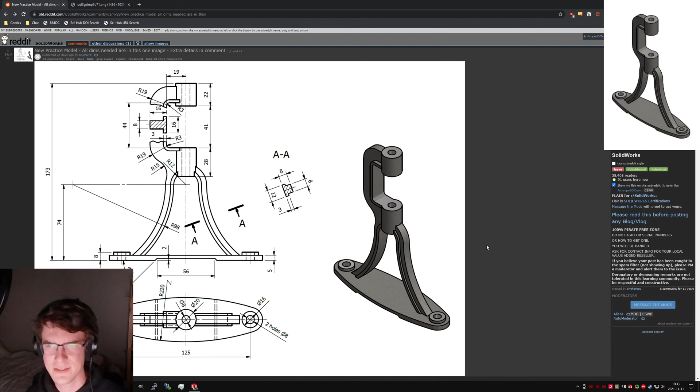Yeah, this is good, okay. It's weird, it's got lots of sort of swoopy sections. It'll be difficult to do feature golf on, I think, just because you have lots of things that'll be interfering with the center hole. So somewhere where you might try to do lots of cut-throughs all at once won't really work.

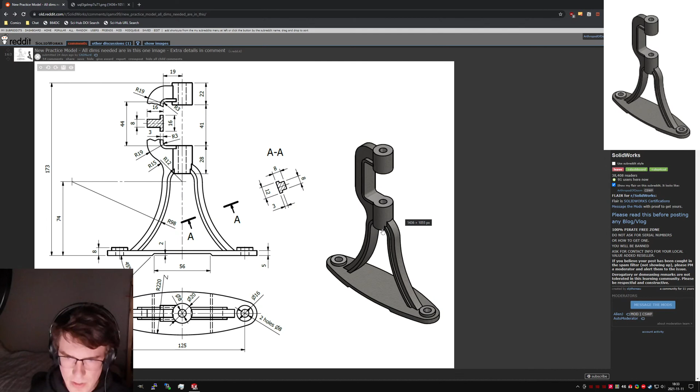Yeah, it should be interesting. So I'm going to chuck this up on my other monitor, assuming I remember how to do that, and I've got a reference up there. And I'm probably going to get some dimensions wrong.

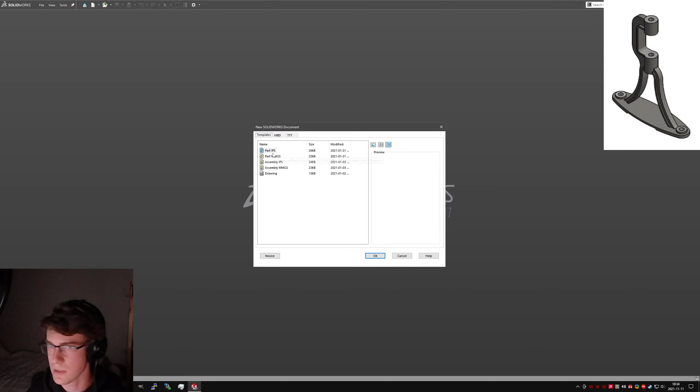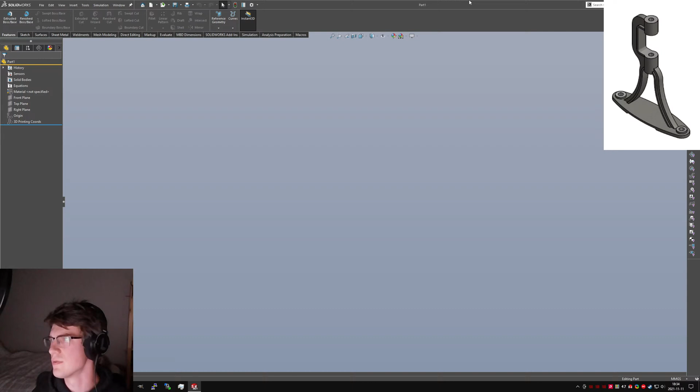And I think I'm not going to do feature golf first, because that's going to be a pain. Yeah, let's not do feature golf first. So I think what I want to do is have... man, it's just complicated as all get out.

We'll start with like the floor, because that's an ellipse and it's easy. Once I remember where ellipses are. Oh, they're not ellipses, it's radii. Oh, gross, okay, well in that case we'll do it...

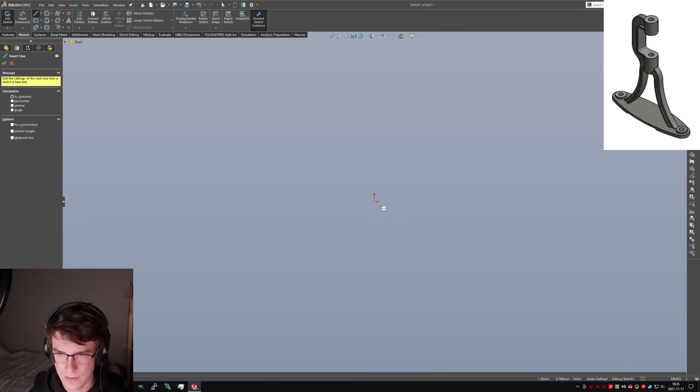Let's come up here and out, and then use this guy. Oops, come on, give me the arc I'm asking for, thank you. Okay, that seems okay, we'll extend this guy. Definitely not going for world records here. Whoops, I made that really close to the middle, didn't I?

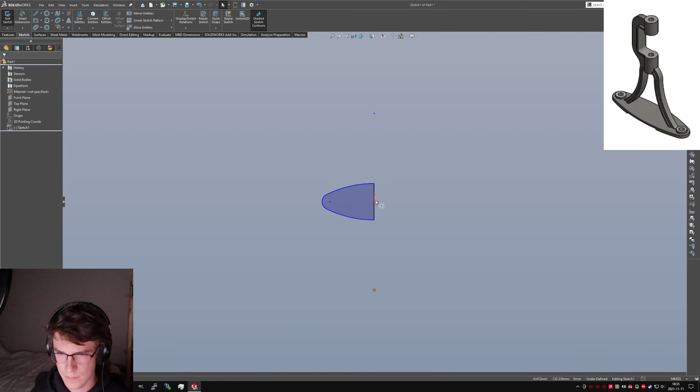Gotta make those on that point so that it's continuous. And we are 220 millimeters. This is 12 millimeters, and these are 125 apart.

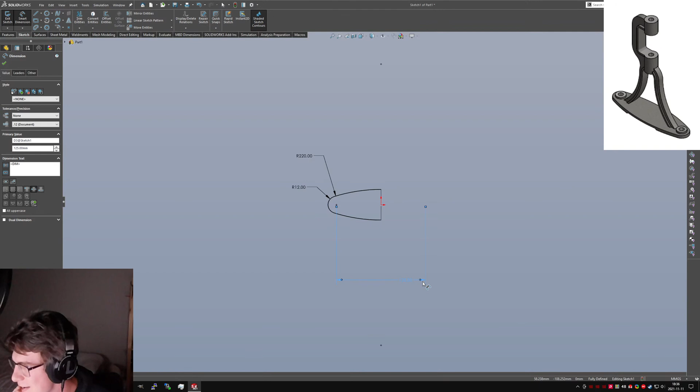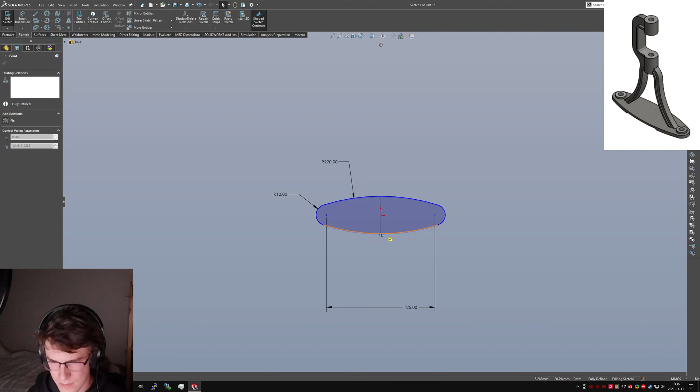Do we have a dimension for the width of this thing? Because it kind of looks like we don't. Yeah, he definitely said all dimensions included, but... hang on, how does that become defined that way? Okay, I guess that becomes defined that way. Oh, hang on, no, I guess that is enough. I think that's enough to constrain all the degrees of freedom.

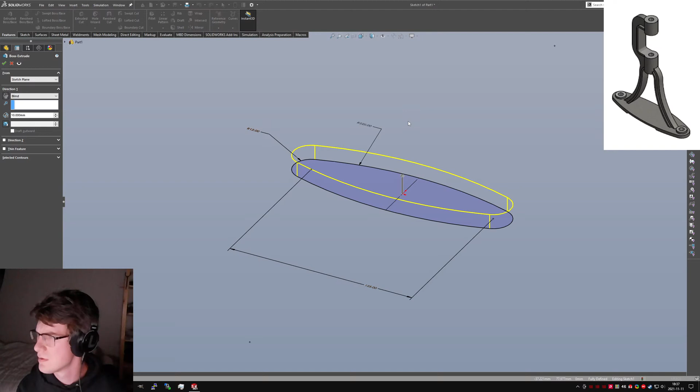Aimed wrong, aimed a little bit funky, maybe I'm just sitting lower. Okay, hang on, where did my reference go? Reference, we're only 5 millimeters tall up here? 5 millimeters tall, there's 2 extruded bosses up here.

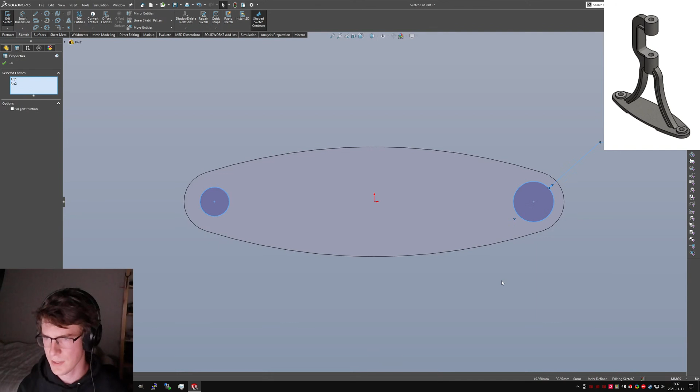Oops, man, something is just laggy today on my machine, do not know what it is. Control A, Alt Q, nope, it selected the dimension too. Let me do it, okay, well that's good anyway. Features, extruded, and because it's dimensioned as being 8 millimeters off the floor, I'm going to do it that way.

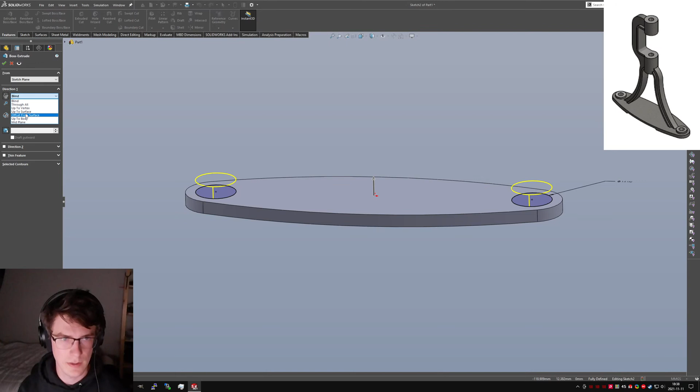So we'll do offset from surface, and from the floor here, let's say 8 millimeters, other direction. Yeah, cool, so now we have this kind of funky clamp shape, which is just bizarre.

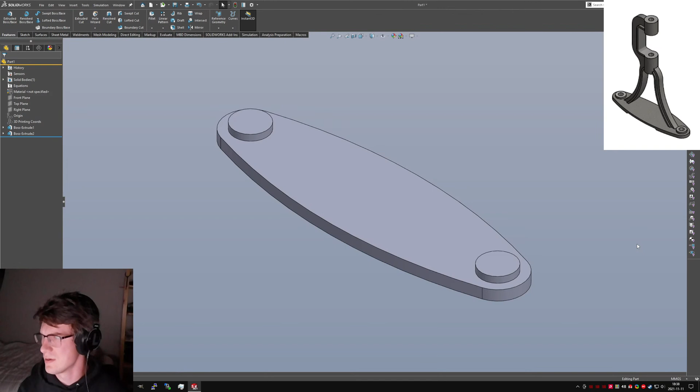I think I pretty much just have to wing this one. Like there's no way around except through. But there's some symmetry, so that's, you know, small victories.

Oh, and there's some crime happening outside.

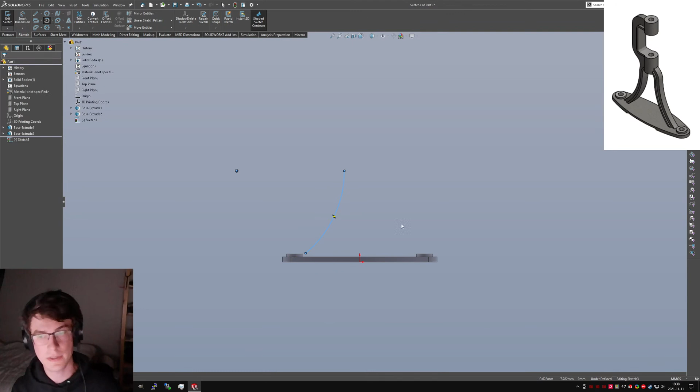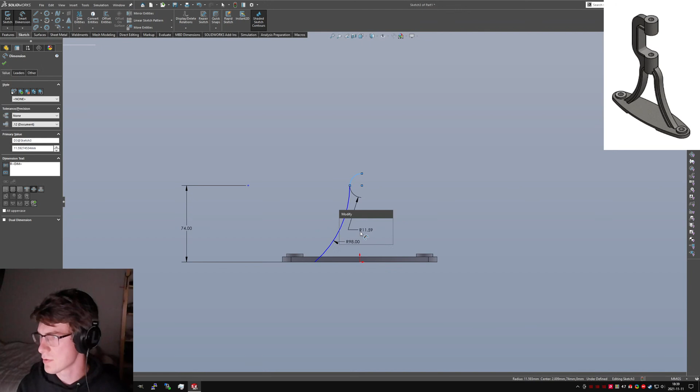Let's do... we only dimension the outside of this one, so we can say that's 98. And say that's 74 off the top. We'll cut that guy there and make this one all do all the things and stuff. That 12. Vertical.

Quickly symmetrize that, see what it doesn't like. Okay. This is a horizontal transition point, so that does need to be horizontal, and then it squares away. Okay.

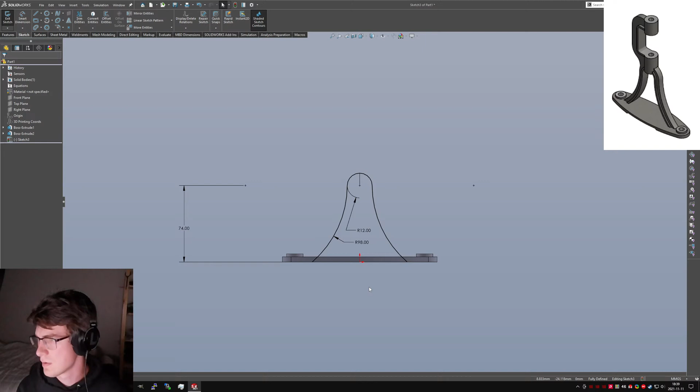And then we do, let's offset this one. We know from this perspective that it's 8 millimeters thick.

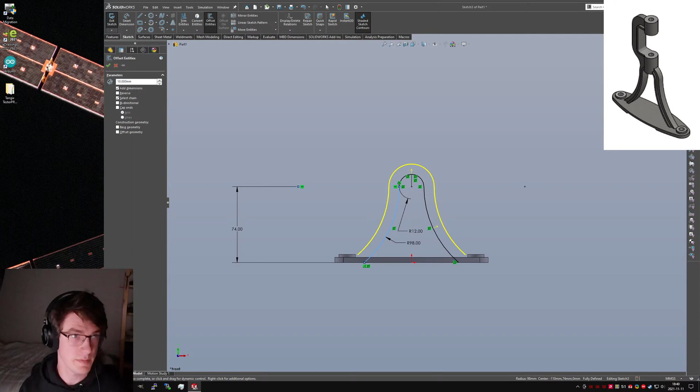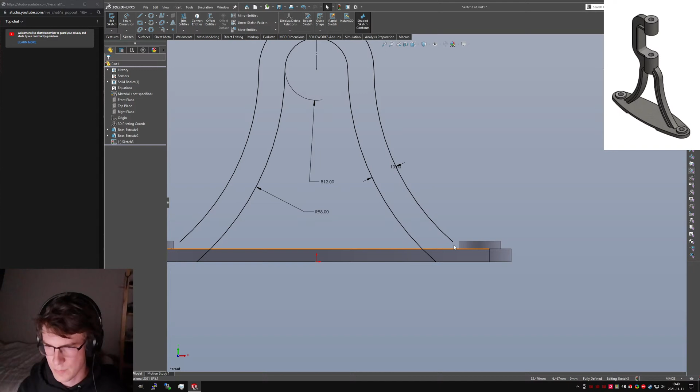I'm good at what I'm doing. Let's offset all of this. And we'll just continue this sort of down here.

Looks right. Now we have to do some more chopping up. Since now we're doing kind of weird... I don't even know what this is. This is getting weird. The shape gets really weird here, and there's lots of sequential arcs traced in funny locations.

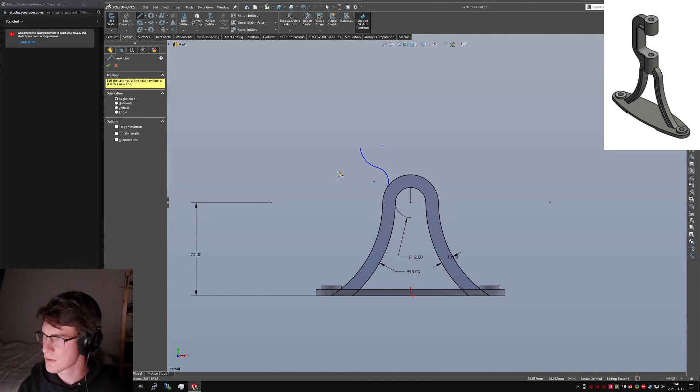Oh, and on top of that, it's not really well defined. But I do know how thick it is, which will help me a little bit, I think.

And I have IDs, as well as ODs for these. 19. These two are equal. Make this one 15, I think, the ID. Yup.

We'll use this reference construction line down here. And offset. Not convert. Whoops. Of course, I'm going to lose my selection now. 16. This is really good.

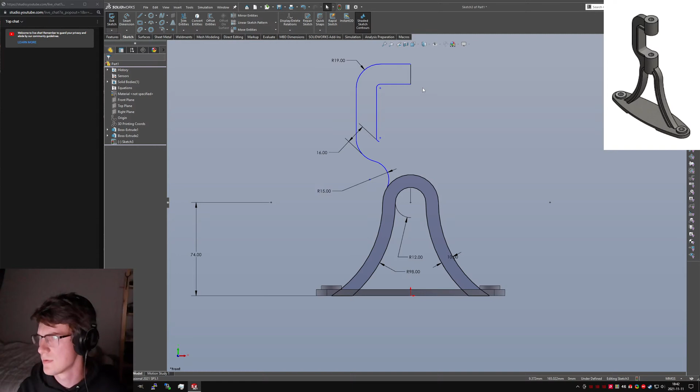We'll just come out to the midpoint here, come down. And then trim, and place with construction. Doink.

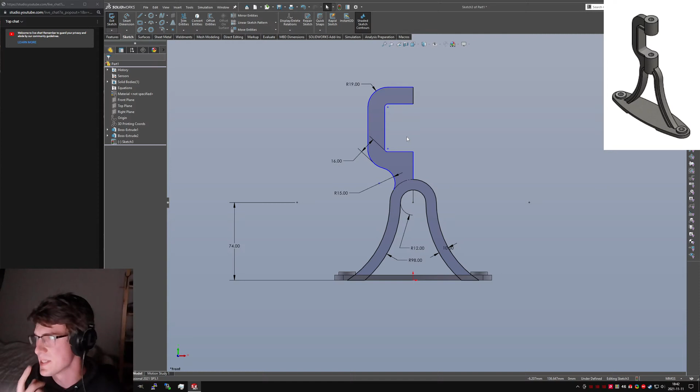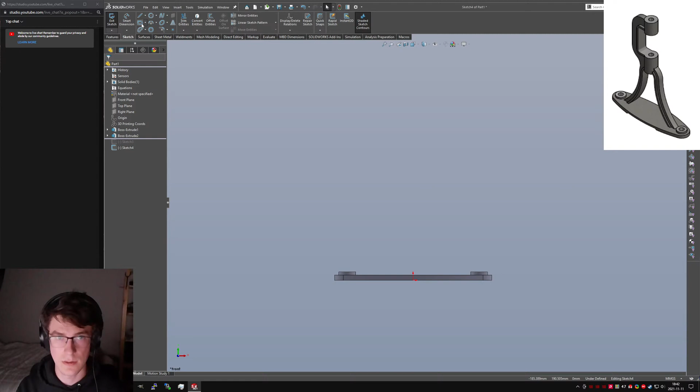Okay, now I think the problem is that we don't have any well-defined heights for the bases and locations of all these things. So I'm going to exit the sketch briefly, and go before this and make a sketch of 2 rectangles. We can use these from the other dimensions. Like, we know the height of this rectangle, the spacing, and the height of that rectangle, and we know the height overall. We can use those to do everything else.

So, I mean, it's a weird way to dimension it, but I don't know. I'm not the one making the casting.

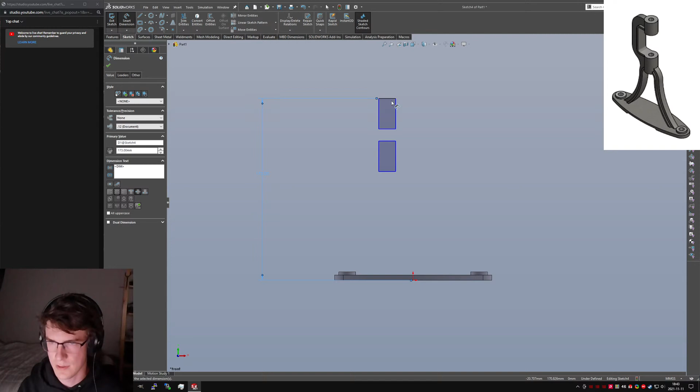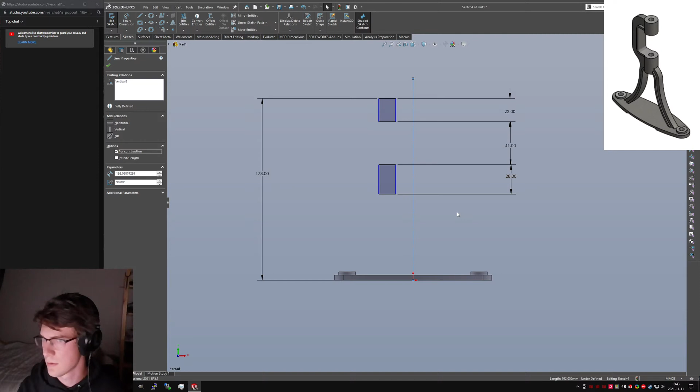41 and 28. Just draw a big line up here. I think I can probably just make that collinear because I want to. They basically want to be solid, so.

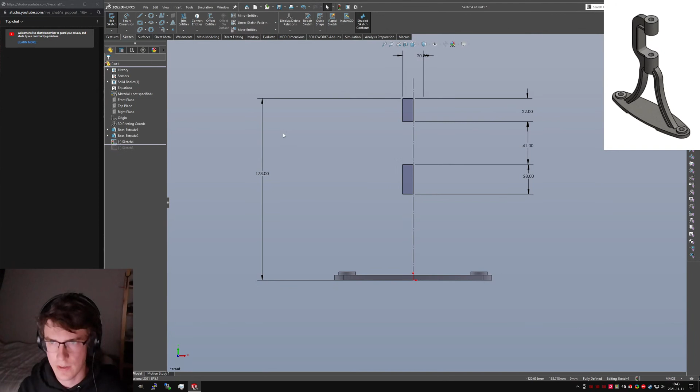But the OD wants to be 20. Collinear there. Features, revolved boss. Should produce 2 things out in space. Great. Okay, now we can use that sketch to control where everything else is.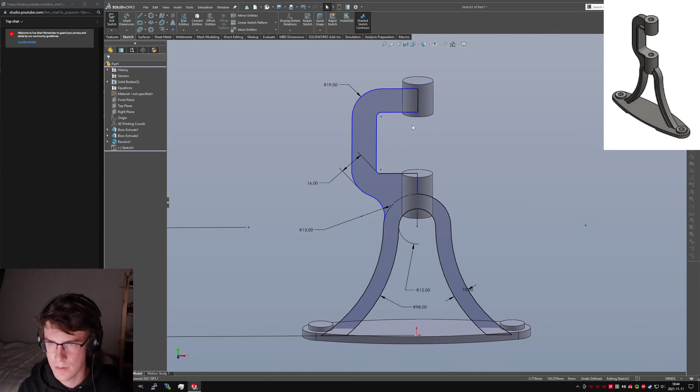Oop, none of that. It doesn't show an offset, does it? Ah, 44 inside in here. I could have figured that out, but I didn't, so.

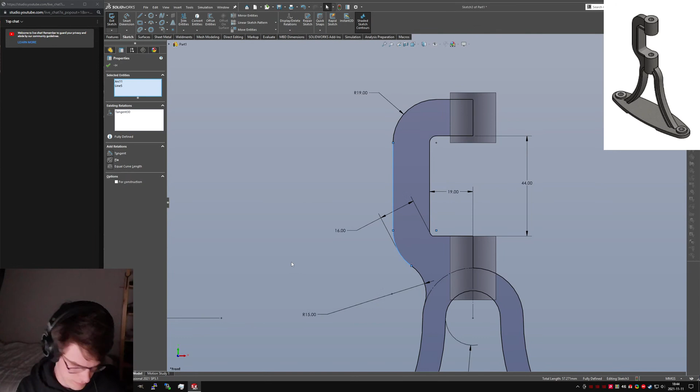Make those collinear. And then 19 off center line. Oop, that's all jacked up now. Oops. Good messages. Sad messages, mostly. Anyway, that's all of that, I think.

And we know it's 8mm thick in all places, so we can just quickly do 8mm, not blind, but mid-plane.

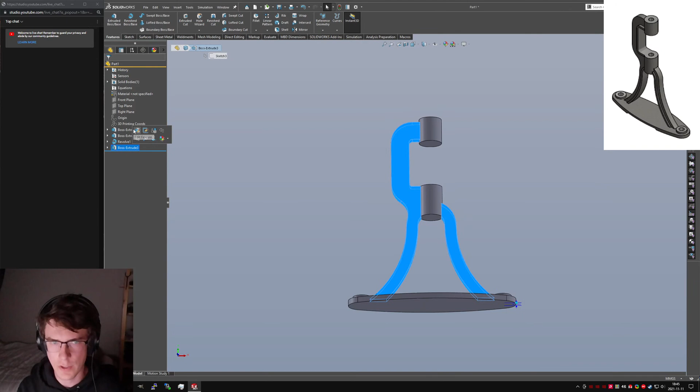Sweet. Ooh, you know what? I can't just assume that is... I can't just merge that, because I need these curves. I need those curves. Maybe I don't. Well, actually, I kind of do.

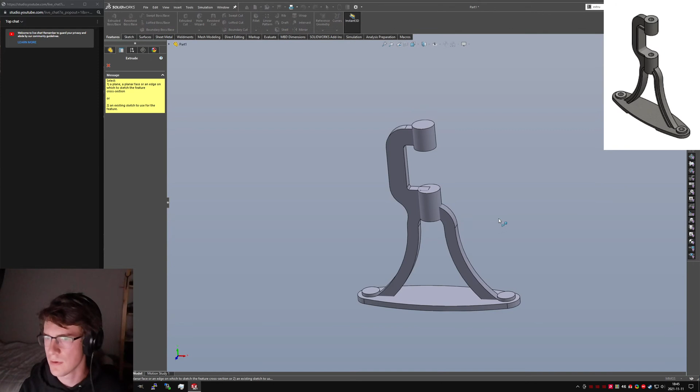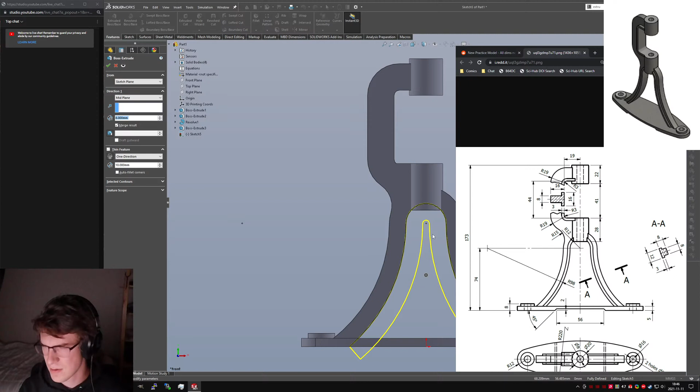So what I'll do is I'll go to the front plane. I'll say these curves, convert, features, extruded boss, mid-plane, and we can use this -- well, I'll have to finish drawing it up first -- but we've got a 3mm thick sort of web. Well, it's not a web, it's more of a foot flange, I guess. It's 12mm thick, so we'll say mid-plane, 12, 3, not mid-plane -- actually wait, yes, mid-plane on the direction. There, it's one direction on the thin feature that I want.

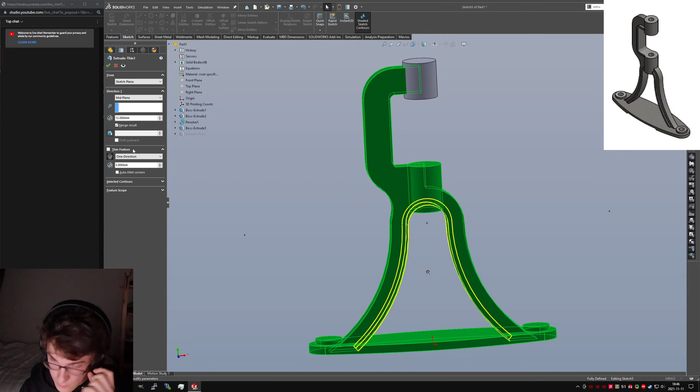There we go. Nice, it merged right in. Let's not merge yet, though. Or if we do merge, I'm going to merge with just this guy. And then I'm going to do the same thing with this one, except it's a 16 web.

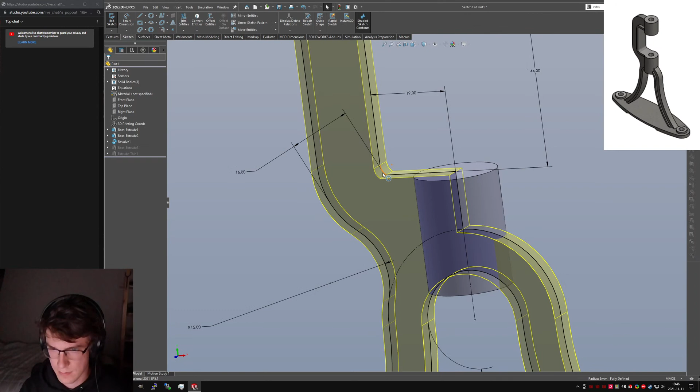And that doesn't look right. Hang on. That should definitely be tangent, right? I'm not hallucinating. We're just going to delete that offset there and not think about it too hard.

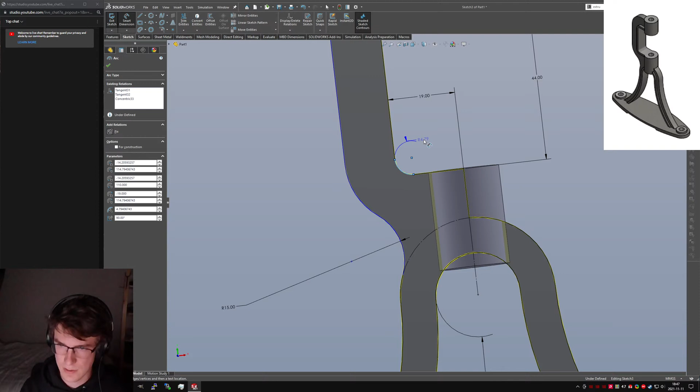Is this tangent everywhere that it should be? Okay, these should be concentric, I think. Why are you suddenly... Oh, because this no longer has a defined depth, and this no longer says 3 on the inside. Yeah, come to think of it, I think the original drawing is actually...

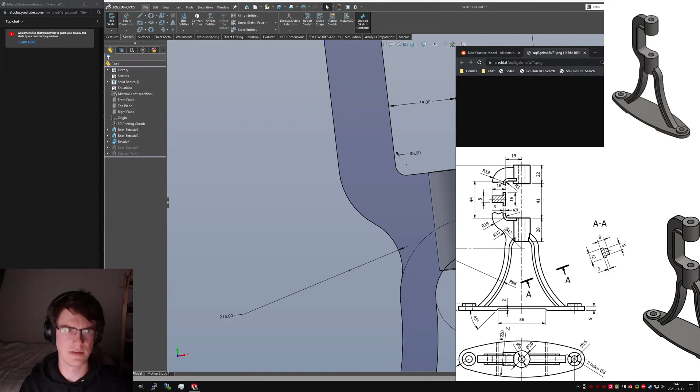Some of those should definitely be construction. Like, yeah, some of these should definitely be construction. That can't say 16, and also R3 and 19, and R3 and 19. Like, some of these should be construction dimensions, which is a little sus, but I don't know. It's a competitive drawing, just to see if you can get it accurate. And also a little bit cockeyed.

These need to be concentric. Some things aren't tangent. There we go. All tangent, all squared away.

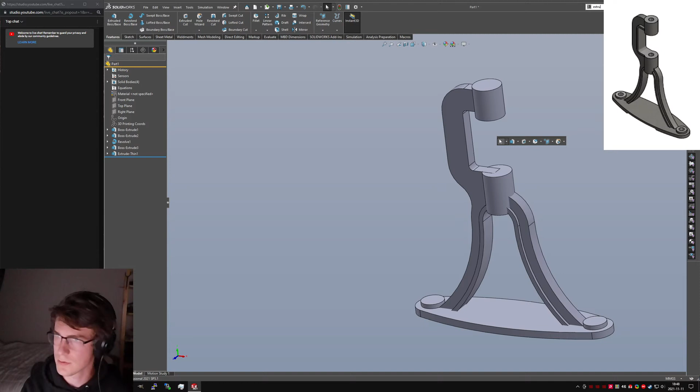Same deal. Front plane. Grab a couple of edges. 16 and 3 thick, so we'll do an extruded boss, front plane. Whoops, wrong plane. Extruded boss, front plane. Thank you.

Convert. Really easy to make webs this way.

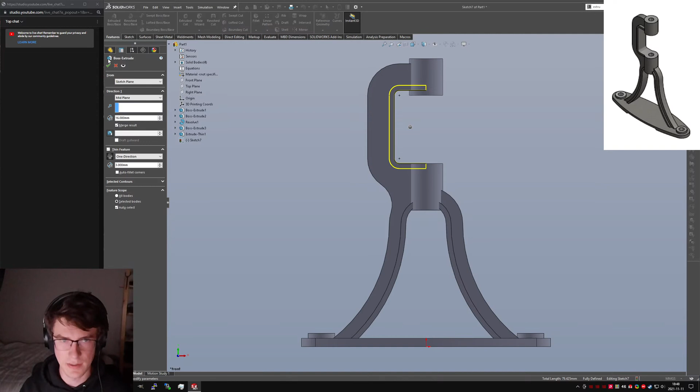And then if we say merge all, it should bring everything together. Correction: merge everything, all bodies, please. Thank you. Although it was clever enough to only merge with this one, which was a little bit neat.

Now I think it's just hole wizards. So, hole wizard. Oh, it's 8 millimeters in every location.

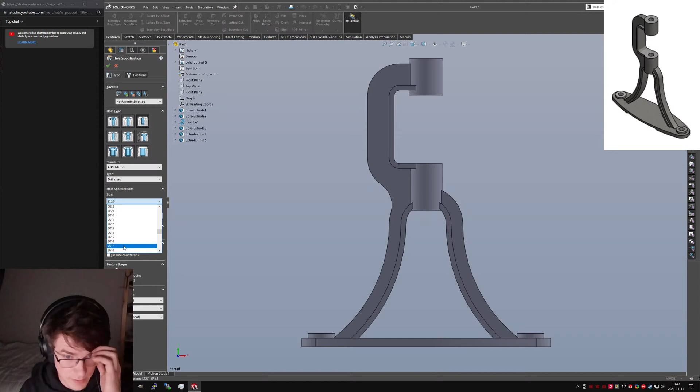So we'll just do... Oh, can't just type the number and have it pop up. That's annoying. So you could do this in 2 different features: one through the top, and then 2 separate ones down here. But I'm not a huge fan of that.

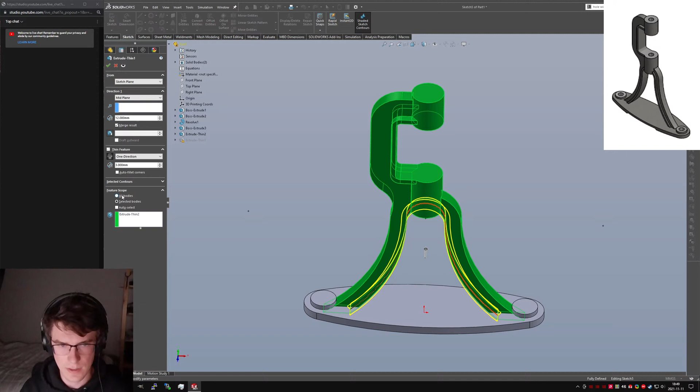I think it's better... Oh, hey, that merge didn't do that. Hang on. If I do the extrudes in a different order, and for this one say combine only with these, then with this one, merge all, then everything merges in the right order.

That's not great. In fact, it's a little dangerous even. Ooh, and merging that one too early means that...

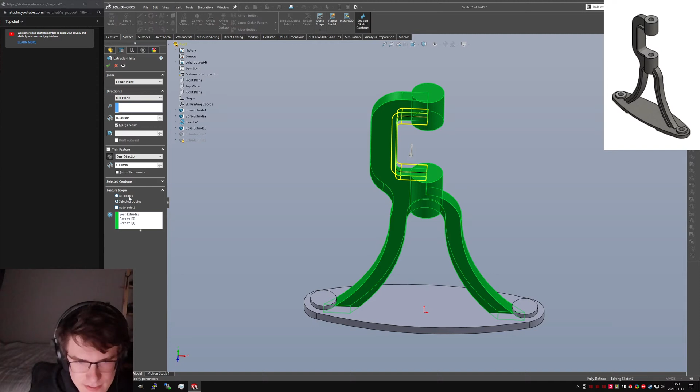Selected bodies. Let's just not merge. And then this one, just merge all. But it still doesn't merge those two.

Let's drag this revolve down. Well, I can't now, can I? Because I've... okay, let's take a peek at the dependency structure. What relies on this sketch? Just that revolve, but sketch 3 and this thin extrude also.

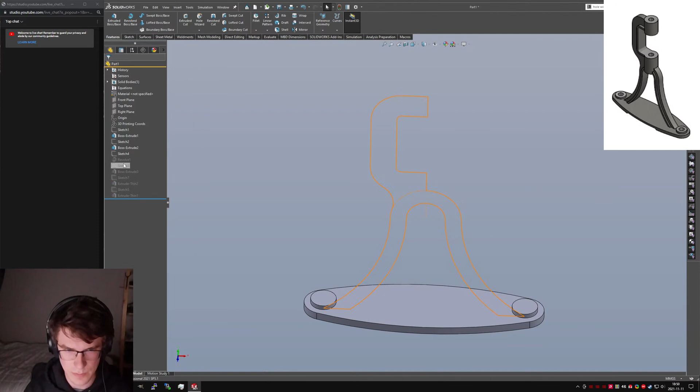Okay, so let's suppress, edit this sketch. Edit sketch. Hidden.

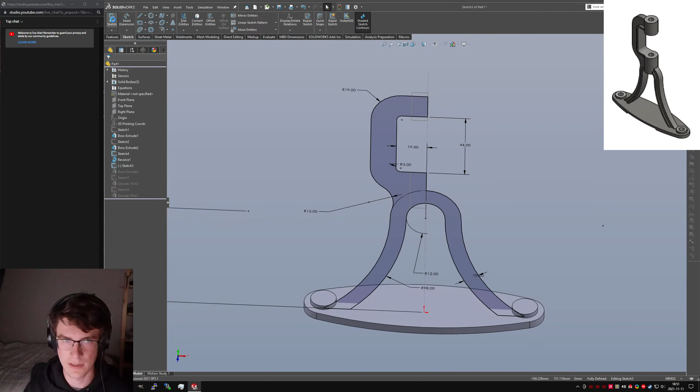Then if we show the sketch, then we can make that collinear. Everything can line up without... like this guy can come down after the... Just suppress everything.

Hang on, now I'm confused. Doy, okay, I don't want to do... let's see, I want to show the revolve, but I don't want to do it yet. Put above its parent feature? What?

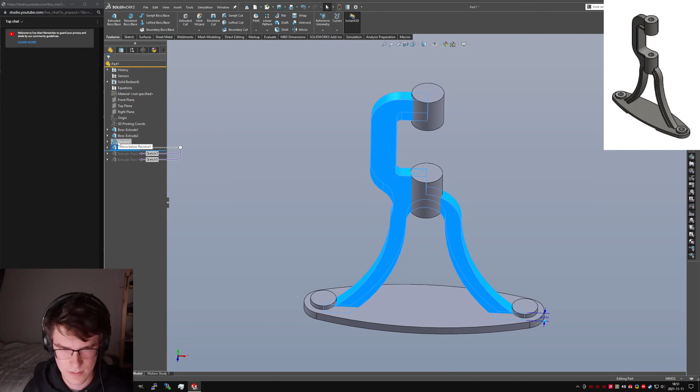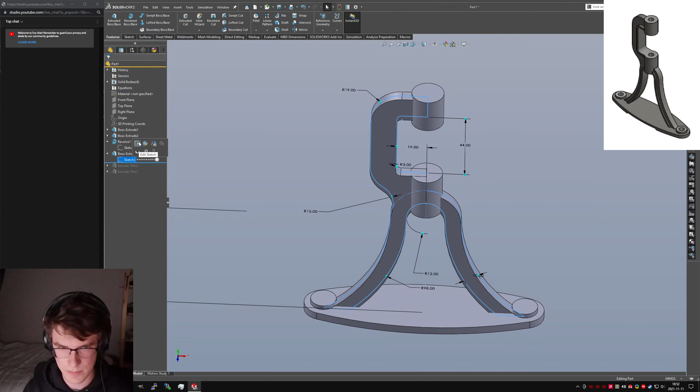Yeah, dynamic reference child. This directly depends on it, and sketch 3 still depends on it somehow. Nuts. I don't know where from.

Crap, I've made links that I don't know how to undo. Frustrating. Whatever, I mean, I could save one feature, one combined feature, if I wanted to break those links properly.

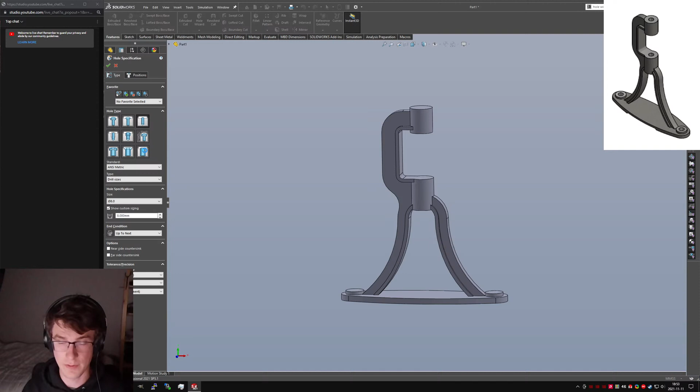Add everything, boink, Hole Wizard, 8mm. And then if you do up to next, that was the clever thing that I wanted to show: multiple faces, 3D sketch. Then you can just do it in all the places, all at once, with one Hole Wizard.

Easy, I think that's... oh, not quite everything. Extruded cut through the front. There is a little cut out in the bottom there, 245, 56 wide.

Middle, and 2. I suppose I could find a way to make those symmetric, but that seems more difficult, so I'm just going to make them both 45. And it's controlled by this length in the middle, 56.

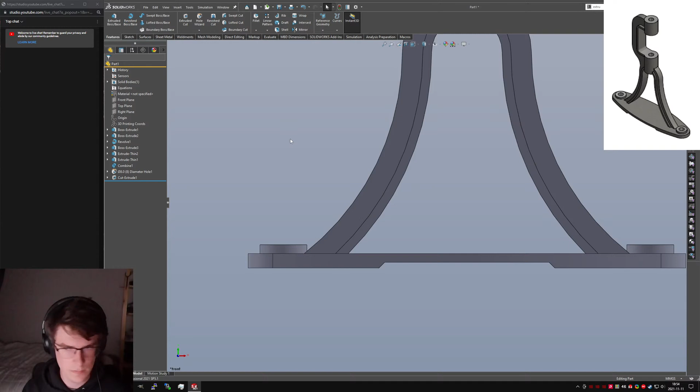Features, extruded cut through all both. Boink. Cool. Evaluate, mass props.

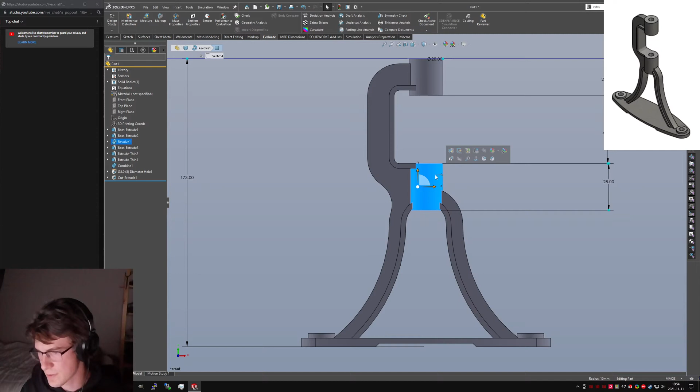Volume is still wrong, nuts. Oh, nuts, what have I done? Okay, 20mm is correct, radius 10 is correct, 8mm through.

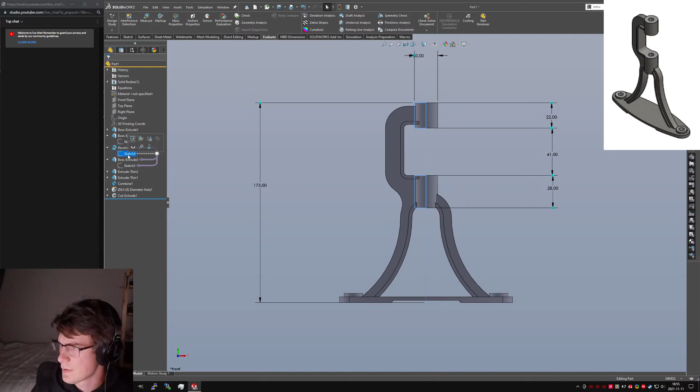Hang on. .98 radius. 74. 173, 22, 41, 28, that's all right. And 20 on the OD is also correct. 12, 88.

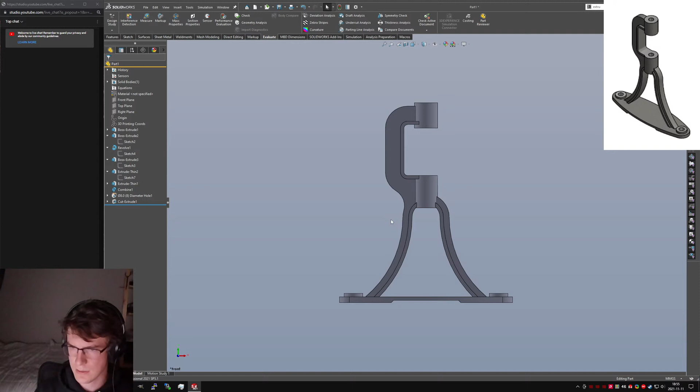Oh, you know what? I bet I made a mistake here. Yep, that is 10, and that should be 8. Is that right? Is that all I missed? Nope, should be 6 leet, and it's not 6 leet. 3, I don't know what. Oh, the 12's the thickness.

16, 3, still seems fine. Still 8. 28. Herm. No idea what I did wrong.

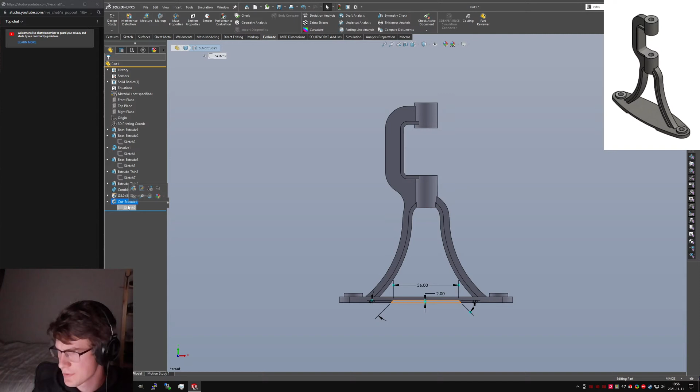That's right, 2mm. 98, 74. On the ID, 15, 19. It's really weird. 19, 44. Ooh, you know what?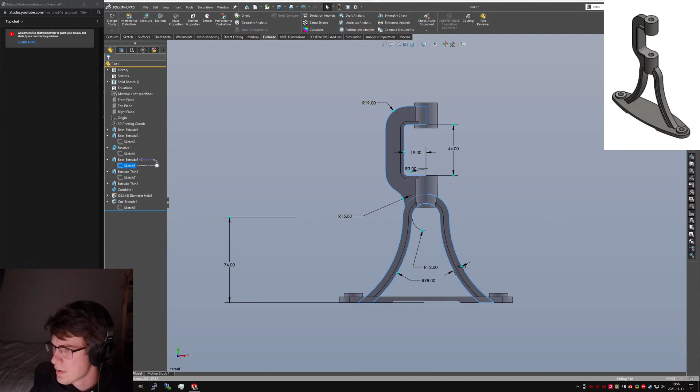Six 1318, no hang on, the answer is not... okay so 61318,493. Going through the comments, 6131850. That one's pretty different, but 6131885, 6131885. Well, that's him asking for other folks. 613185, 613189. I think I got it right, actually.

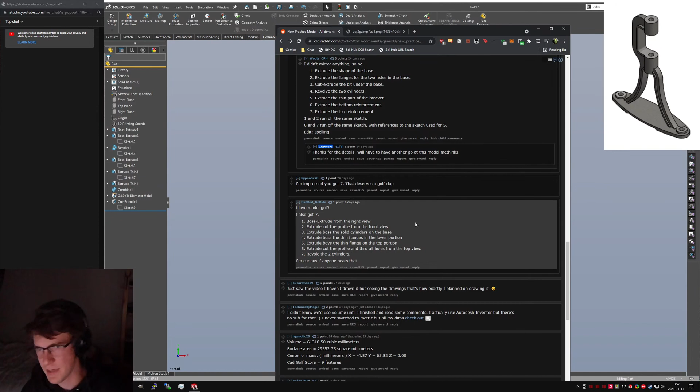Only took me 25 minutes, that's not bad, especially for accidentally getting it wrong at first.

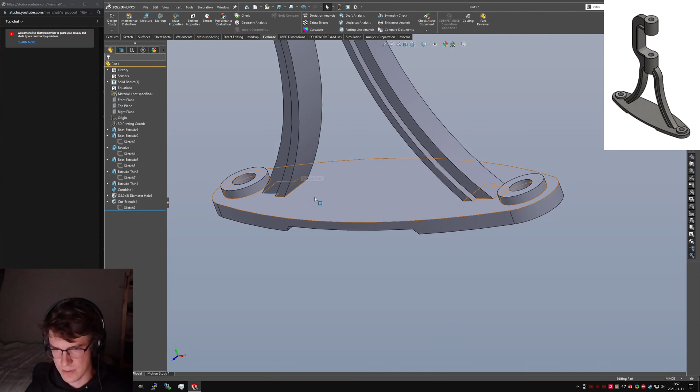Because 8mm looks real spindly, like that would not fly. You'd want to have... I'm assuming this is probably a double-sided casting or something with a... like you'd want to put an extra gusset in there. Just not worth doing it without the gusset.

Ooh, well. Yeah, it's a part. Call this challenge part, I guess.

Was it already 7? Goodness. How is it already 7 and everything's all dark outside? Stupid, not daylight savings.

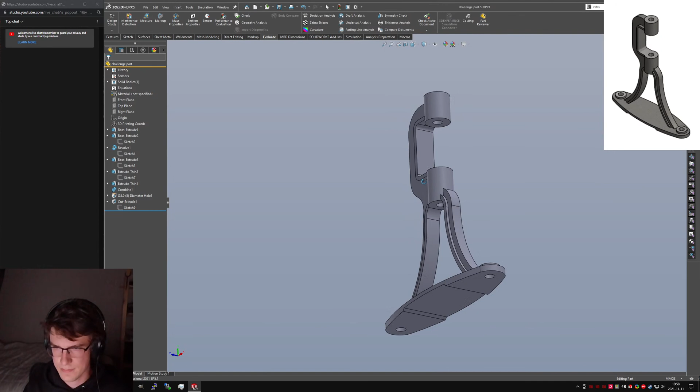Well, I think that's all I've got. I just wanted to stream doing it one way, and I think, looking at this now, my original guess was 9, or I think my original guess was 8 features if you really tried to scrimp and save. Like, maybe there's a way...

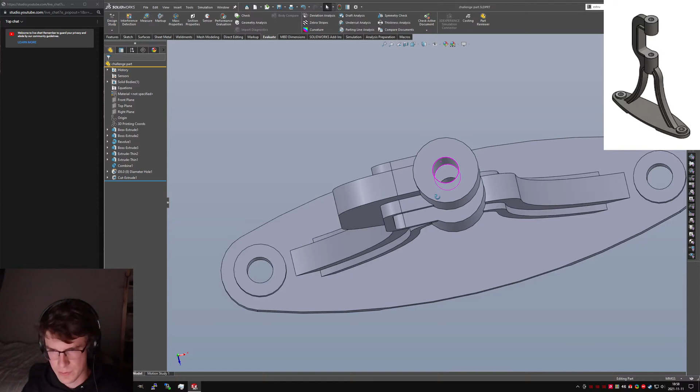We look at the top plane, this to here from a front view. You don't necessarily have to make this solid, but it makes everything else such a huge pain. You could end this extrude here, but it's so much easier to just have a hole feature at the end. And I could skip out a combine, maybe, if I knew what I was doing.

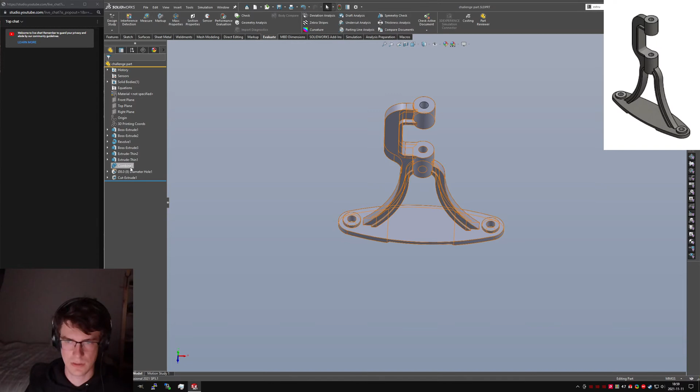Ooh, what I could do is, instead of grabbing it off this feature, I could use one sketch, and then I could skip the combines. Yeah, that's how I could do it, but I'm not gonna. I need to go sleep.